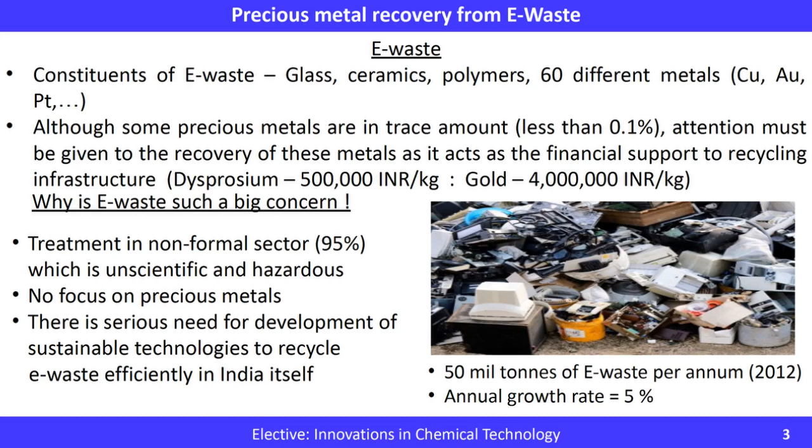Next, I'll tell about the extraction strategies. First is the traditional method, which is open air incineration and uncontrollable burning - these are pyrometallurgical techniques like smelting, sintering, melting. In these methods, fumes of heavy metals like mercury, cadmium, and lead are released, and formation of halogenated dioxins occurs as well. This method is very expensive and energy intensive, and selective recovery of metals is not possible using these methods.

Hence there is another set of methods known as hydrometallurgical methods, where a series of acidic or caustic leaching are used to extract precious metals from solid materials using acids like cyanide, halide, thiourea. These are safer as well as more selective. Because they are more selective, proper recovery of base metals from the solid material ensures enrichment of precious metals in the solid sludge left over, and thereby we can recover precious metals more easily. The major disadvantage here is that it produces a large amount of liquid sludge due to the inorganic acids used in hydrometallurgical processes.

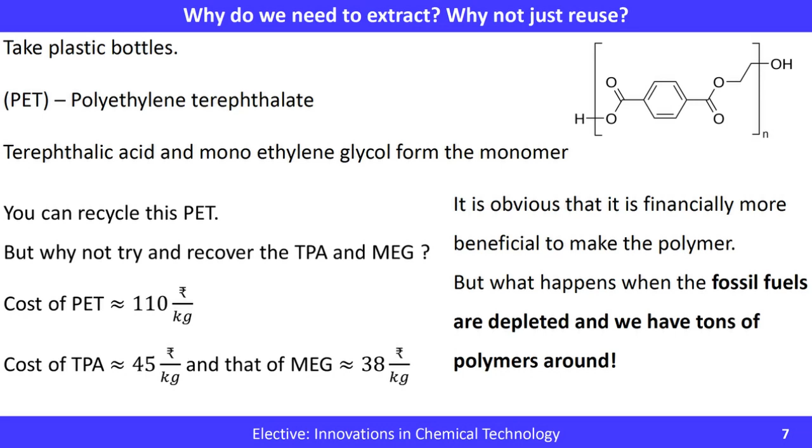It's obvious that the cost of PET is much higher than the raw materials. Otherwise it's not beneficial to make this polymer. But what happens when the fossil fuels are depleted or very low and we have tons of polymers lying around? At that point, this idea might become useful, like extracting those monomers.

We know that polymerization reactions are highly exothermic, which is one of the most important reasons why this idea might be very difficult to implement. There is a huge amount of heat that has to be supplied to break these bonds.

However, some of these polymers actually depolymerize naturally. One of these, ethoxyethyl cyanoacrylate, is used in surgical sutures since the polymer bonds break after a certain time. So we have this dissolving type of stitches. This polymer breaks down after stitching, which makes it easier, so you don't need to remove the stitches after that.

So we must use biodegradable alternatives or design polymers that can degrade when required, that is, they have sort of a timer in them. After a certain time, they will degrade. Thus, this idea of monomer recovery is not new. However, it's difficult to break these bonds, which is why it might face difficulties in implementation.

So the equipment part of it is we focused on the Bosch process, the Haber-Bosch process, and we will focus on the process development part of it.

Can I just ask one question on each of your presentations? Yes, sir. I mean, at that point, okay? Before you go to the next presentation. Right. Yes.

I thought that in the biometallurgy area, although it looks like a very good idea, and you are talking about having genetically engineered strains which are maybe more effective, but I think one of the things we'll need to look at is that an enzyme which is probably confined in the active constituent is confined in the cell, and you've got a solid substance. How exactly does the reaction occur? I mean, how exactly do they see each other? What is the way in which these things penetrate into the core of the mass so that they can react?

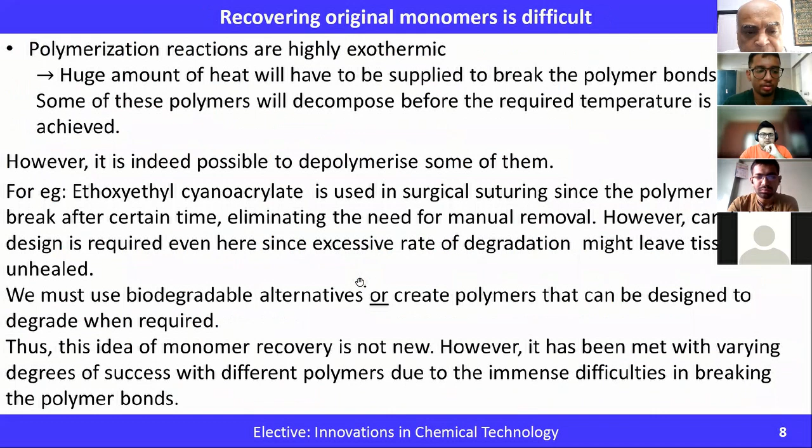Now, in terms of also the idea of using a biodegradable polymer, you have given the analogy with the suture, but in those cases I'm not really getting back the monomer. I don't know what really happens. Do you get back the monomer? No, sir, in that case it is essential that it is disposed of.

But if we design these materials with a signal that if you reach that temperature it might break down spontaneously, then the task of recycling becomes easier, because then you just take them and once you apply those conditions they automatically depolymerize. They have been designed to depolymerize, but what you have to see is whether they depolymerize or whether they decompose, go all the way decompose.

Yes, sir, I think that's the biggest problem, you see, because if it is depolymerization, then of course the energetics will again come into play, since these are very endothermic processes. Okay, but that's all right.

There are so many uphill reactions catalyzed by enzymes, but you have to make sure they're targeted for monomers rather than just going to CO2, because that polymer bond is one of the strongest in most cases. The analogy with the suture is good, but remember there are basic differences between the two. Their recovery is not the priority here; the bigger issue is just getting rid of it, not recovery.

In the Bosch process, we focused on the heat exchange and instrumentation part, since material and lining design of the jacket was already covered. The first thing Bosch tried was heating the converter, the catalyst bed, externally using heating gases across the jacket. Problems encountered included temperature gradients forming across the jacket, and at high temperature the low strength of steel caused buckling and cracking of the tubes, even explosion of tubes due to cracking. Heat exchange was insufficient, so Bosch had to use two additional regenerators in front of the contact tube. This configuration was used, and the spiral tube was later replaced by a vertical regenerator to avoid pressure losses.

So the next thing Bosch tried was to overcome these difficulties. Internal heating of the converter was done by passing syngas and air, and heating occurred by combustion of this syngas-air mixture. For bigger production, Bosch found that the heat of reaction was enough to maintain the temperature, and they only needed to heat initially to bring the bed to the required temperature.

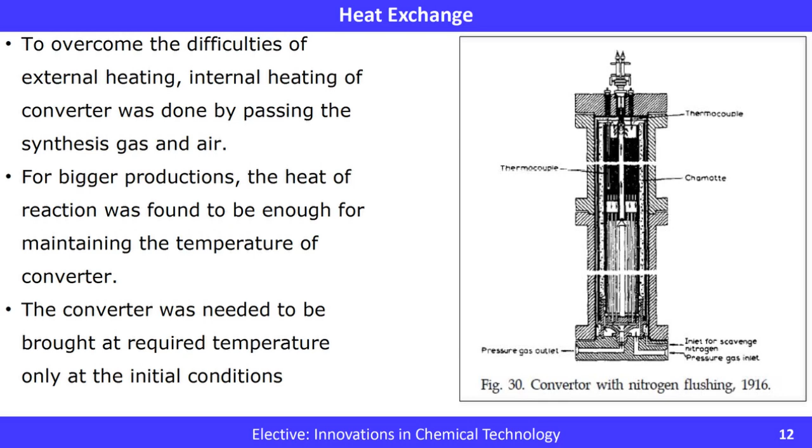There were also disadvantages with internal heating using the syngas mixture. Gas heating needed to be done in reverse mode with respect to normal operation, causing cracks in the lining due to stoppages. The heat supply was from a single point where the air and syngas mixture combusted, which led to temperature gradients. Gas heating was eventually replaced by electrical heating, using an electrical wire of 5 meters length passing throughout the catalyst bed, achieving uniform heating.

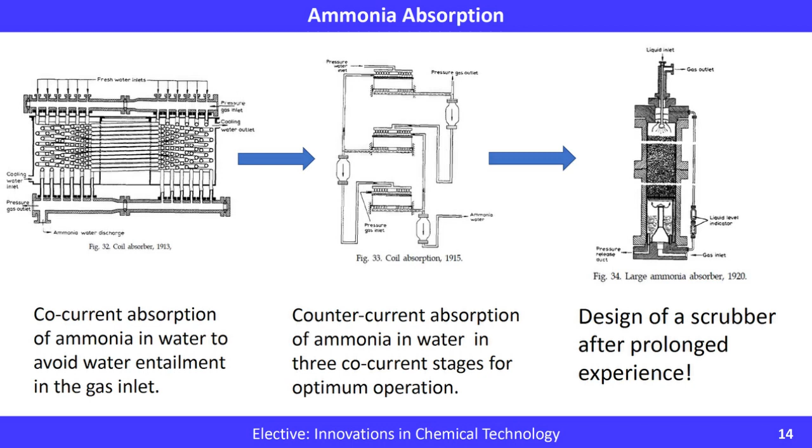The next part was absorption of ammonia in water. Bosch followed several strategies. First was co-current absorption in water, done to avoid water entrainment back into the ammonia reactor, with water and ammonia flowing in co-current direction. Due to the inefficiency of co-current operation, they replaced it with three counter-current stages, eventually achieving a final counter-current absorption mode, which was the most efficient scrubber design.

Another remarkable thing was that they built their own equipment—today most instruments are available commercially, but at that time BASF built and tested their instruments in-house. Some of these instruments were the pressure balance to measure gas pressure, a previous version of the manometer using a U-tube and mercury, and the density meter to record gas densities.

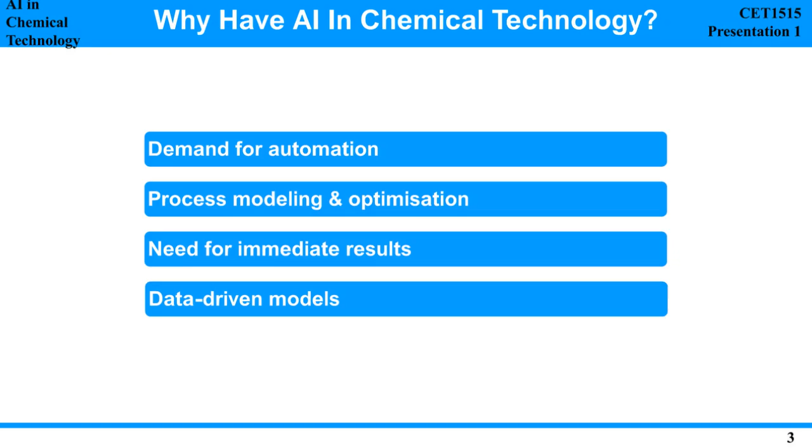So we will just look through one of the seminal artificial intelligence algorithms developed over time. The initial one implemented in chemical engineering was: if we have a certain raw material, what should be the intermediate reaction steps needed to get a product, and this has to be the most efficient way to reach our product.

So what they did was assume multiple reaction pathways. Each reaction was assumed to be elementary, or depending on like if it was hydrogenation, what would be the typical kinetics of it. They had thermodynamics data like heat of formation, heat capacity, and used these to model different reaction pathways and find out which process synthesis method was most optimal.

Next slide. This is called the expert systems era, which lasted about a decade. What happens in this process is it's dependent on knowledge. So what they did was give certain governing equations, like if you have a stirred tank reactor, what would be the temperature and residence time dependence, what is the thermophysical data of the entering reactants, and what should be the constraints, like the temperature should lie within a certain range and the pressure should lie within a certain range.

So they developed this as an if-else statement, which is still a pretty rudimentary artificial intelligence algorithm. For example, if process A was a stirred tank reactor, if the conversion is not achieved in one reactor, the if condition could be should we add another reactor and proceed to the next step, or if conversion is being achieved we can directly move on to the next step. This was the concept behind MODELL.LA, developed by Stephanopoulos in the 90s. Next slide.

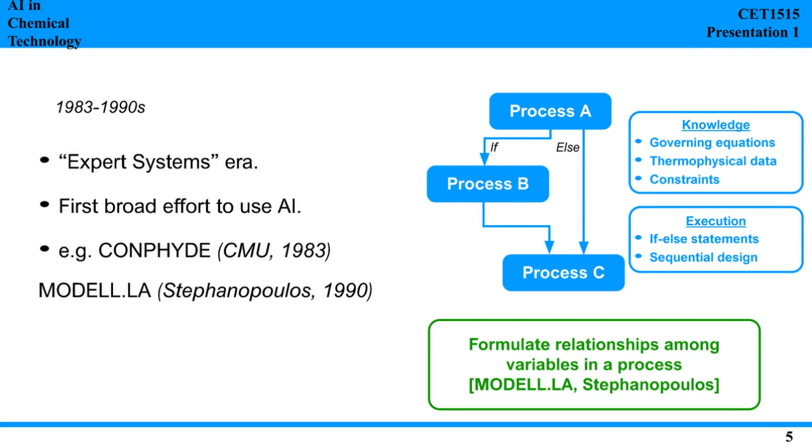This was known as the neural network era, because previously neural networks were designed only for linear systems. In image recognition, we don't need to know what is the mathematical model in between, as long as it is predicting. But we cannot do that in chemical systems, because we need the in-between steps to also follow the physical laws. So they started with a bottom-up approach, where if you can easily model small units of a process, you can scale that up to a big unit, instead of a typical top-down approach.

The reason this was implemented in chemical engineering was that mathematicians had developed non-linearity in the neural networks.

And we have HT kinetic data, which is high throughput experiments, so from experiments we have certain kinetic data. What they used to do was develop different models, use a neural network to find the rate constant mechanism, and through this find out which was the most efficient catalyst for a given reaction. This was how catalyst design would be carried out using artificial intelligence.

Next slide. Presently there are three major tools that were developed. The first is an artificial neural network. So from a typical neural network, an artificial neural network mimics how the neurons in the brain work, so it becomes a more complex structure.

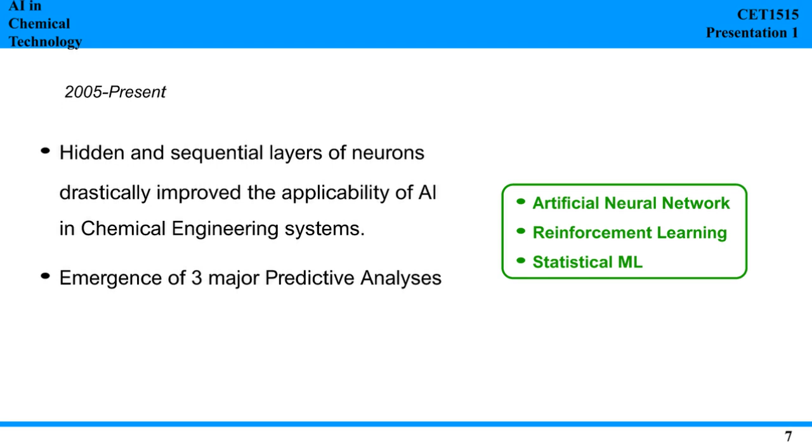Don't exceed your time. Huh? Oh yes, sir. Yes, sir.

The first one is the oil production rate from a well, which they modeled using artificial neural networks. The second one was operating a distillation column, where they used a first principles model to develop the mathematics of the flow rate, and incorporated a neural network to reduce the fluctuations in profit.

Next slide. So why is AI not more prevalent in chemical technology? This is because chemical systems are very difficult to model even today, and there's a lack of interest in commercializing AI in industries, because conventional models are still functioning as effectively as AI today. There was also a lack of data and computational power back then in phase 1 and phase 2, because of which there was no motivation or practicality at that point of time.

There were also intellectual challenges — people were not used to handling computational equipment as well as they are today. Next slide.

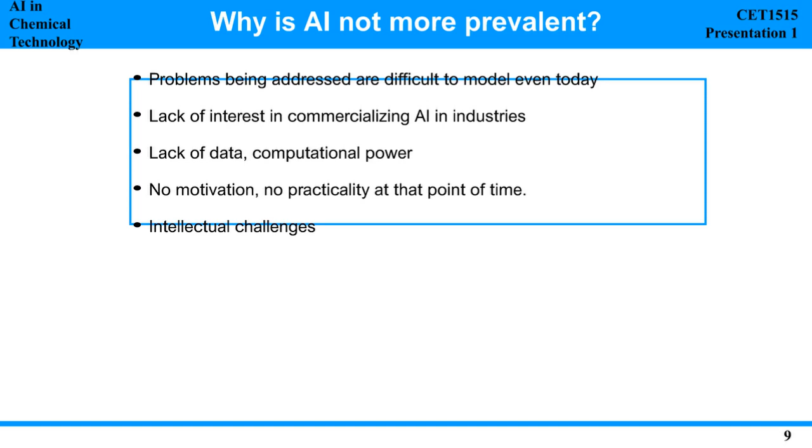But these problems are going away due to the following reasons. One is Moore's law, which has improved computational power to a great extent, and data collection has become more prevalent. People are focusing more on collecting data and incorporating it in AI, and new programming languages like C, C++, Python have made coding more user friendly. Hence more people are able to use AI and ML, which was particularly the push for phase 3 — to develop AI to outdo the existing technologies.

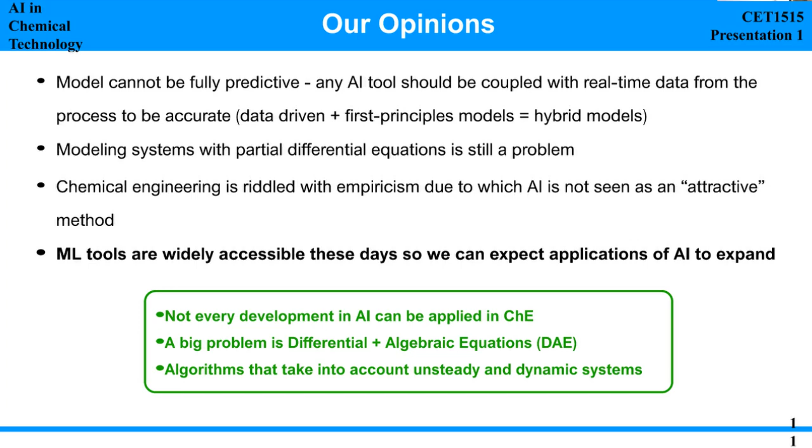But modeling systems with partial differential equations coupled with algebraic equations, called DAE, is still a problem. Even though AI and ML have improved over the last 40 years, we still do not have a concrete solution for the Navier-Stokes equation. Chemical engineering is highly empirical of all engineering branches, and that is a major stumbling block for the application of AI in chemical technology. Because of its empiricism, AI is not seen as a very attractive method. But ML tools are widely accessible these days, so we can expect the applications of AI to expand in the near future.

So I was guided to this process where we could describe a non-ideal reactor as consisting of a network of several small ideal reactors, each having its own temperature and residence time, because the non-ideal reactor had a lot of temperature variation. If we had tried to model this accurately with mathematics, there would be a lot of differential equations, and it would be very complex. But by modeling it as a simple network of ideal reactors, the mathematical model was simplified, and we can use neural networks to find out what were the rate constants and what the reaction pathway actually was.

This was a second example of using ML tools which I encountered during my research project. We were working on the extraction of acetic acid from water, which requires the estimation of partition coefficient using thermodynamic models, and the one that we chose was UNIFAC. Its activity coefficient calculation includes combinatorial and residual activity coefficient, which is called gamma.

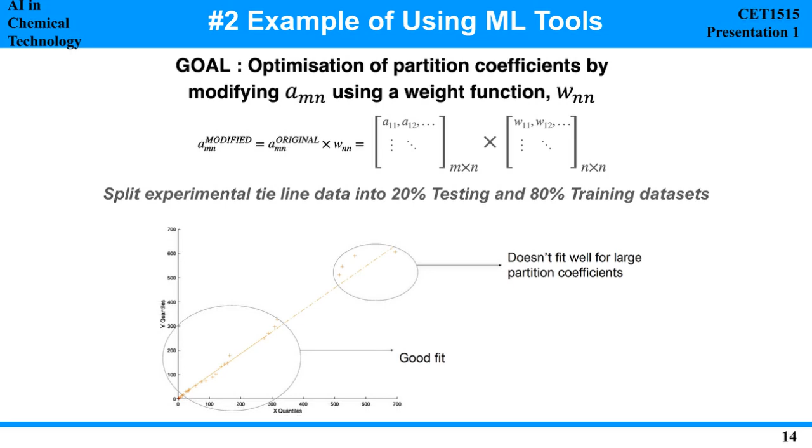So the first part is over.

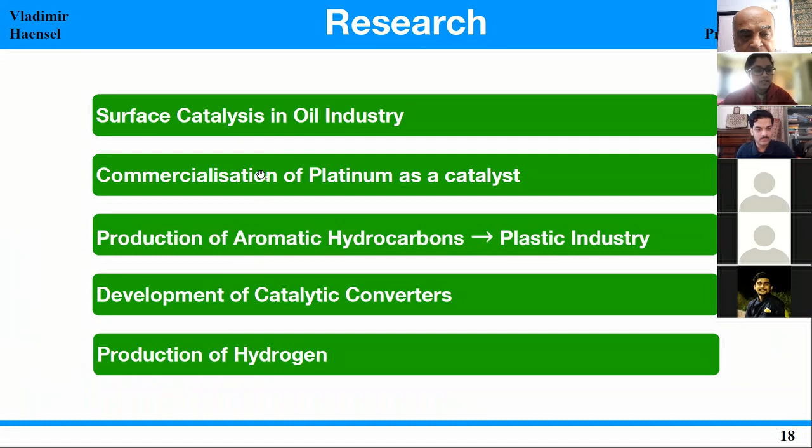So Vladimir Haensel's research mostly focused on catalysis, and he was responsible for the commercialization of platinum as a catalyst in the platforming process, which will be discussed later. The platforming process was very pivotal because it was producing a lot of hydrogen from the dehydrogenation reaction, and also a lot of aromatic hydrocarbons, which were later incorporated in the plastic industry. His platforming process was also pivotal in developing catalytic converters.

So before platforming process.

The industry used to use thermal reforming, where crude gasoline went into a cracking reactor, and at around 800 Kelvin and pressure between 30 to 70 bar, the dehydrogenation reaction would take place. It was fed to a fractionator, where we got upgraded gasoline with aromatics with a higher octane number, and the light hydrocarbons, mostly methane, ethane, butane, were sent to a mild reformer to create more aromatic compounds, leaving certain residue. But the octane number was still not high enough, only going up to about 65 or 70. So people used to add anti-knocking agents like tetraethyl lead to increase the octane number.

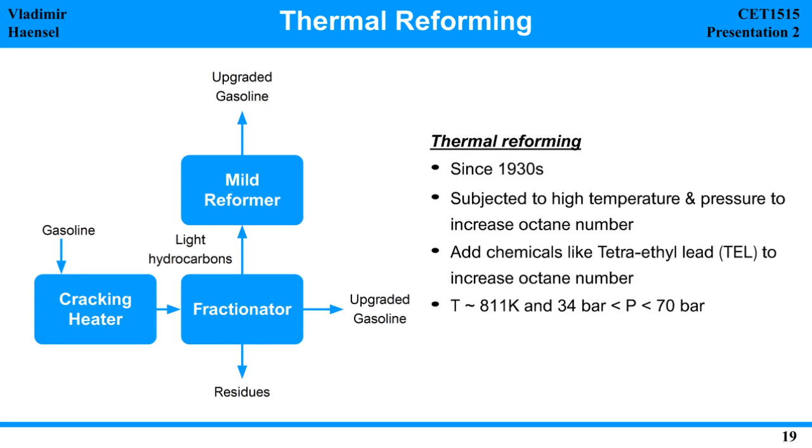The platforming process was the major accomplishment of Vladimir Haensel, who recognized that only the surface atoms of a platinum catalyst actually assist in the catalysis of the reaction. He found that only 0.01% of the total surface, if embedded with platinum, is actually able to give the desired conversion. So what he did was use alumina, and alumina with silica, as a support, and embedded platinum catalyst particles, which people today focus on as nanoparticle technology.

He also found a way of regenerating the spent catalyst using sulfuric acid, because there was formation of platinum alumina silicates, and treating it with sulfuric acid would regenerate the pure platinum.

The use of alumina as a support was another important aspect, because alumina is a Lewis acid, due to which the paraffins in the feed would dehydrocyclize to form aromatic compounds. This was another pioneering invention, because aromatic compounds actually opened or bridged the petroleum industry with the plastics industry. Due to this dehydrocyclization, there was also presence of a hydrogen-rich gas being formed, which was used in hydrotreating sulfur and nitrogen compounds to reduce pollution. So Vladimir Haensel's one stroke of using platinum was a master stroke in 3 different industries.

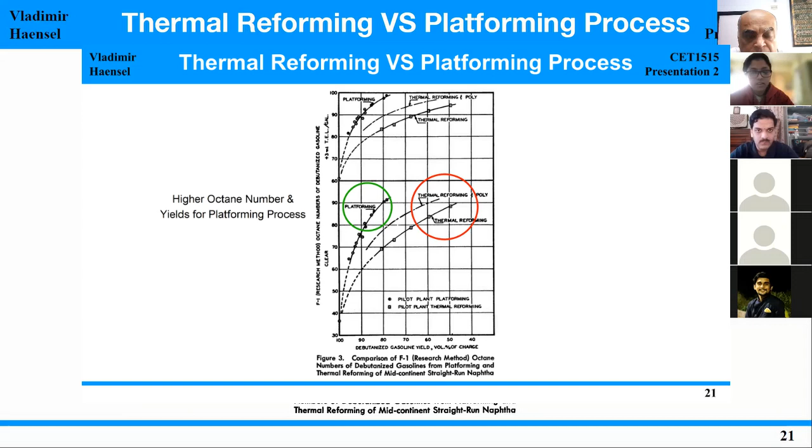Okay, next slide. So this is just a summary: previously with the thermal cracking process, you used to get 65 octane number fuel, and there was an introduction of tetraethyl lead, but there were a lot of environmental concerns. So this was where Haensel at UOP pioneered the platforming process.

Previously, platinum was considered very expensive, but with platinum and alumina support, Haensel argued that in the long time the cost won't be much because of the high value addition from generating hydrogen from the dehydrogenation reaction, and also aromatics like benzene, toluene, xylene, which were later used by the plastic industry.

And this hydrogen is used for treating the crude gasoline that enters the reformer, because if the crude gasoline contains sulfur and nitrogenous compounds, it can deactivate the catalyst. So by hydrotreating it, we can convert sulfur to hydrogen sulfide and nitrogen to ammonia, preventing deactivation of the catalyst using the hydrogen we get from the platforming process. Next one.

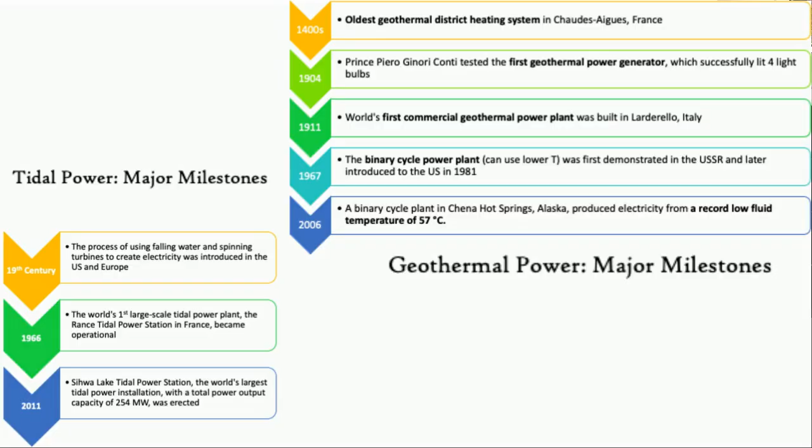Nuclear fission was first discovered in 1938, and the first nuclear reactor was made in the US in 1942. This grew pretty quickly, and in 1956 the first commercial nuclear power station was set up in England and connected to the national power grid. Next.

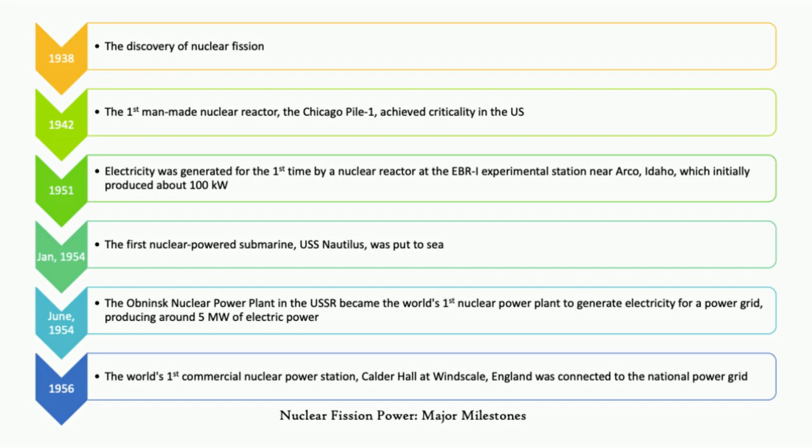Okay, so let's talk about the present scenario. Just speak a bit louder, it cannot be heard properly.

So as we can see on the slides, while hydel and tidal energy have very high energy efficiencies, the rest of all the other energy sources have pretty much the similar efficiency, with the exception of geothermal, which is very low. Also, renewable energy sources make up a very small proportion of the total electricity production, and hence, we are extremely reliant on fossil fuels, where their contribution is almost 85%.

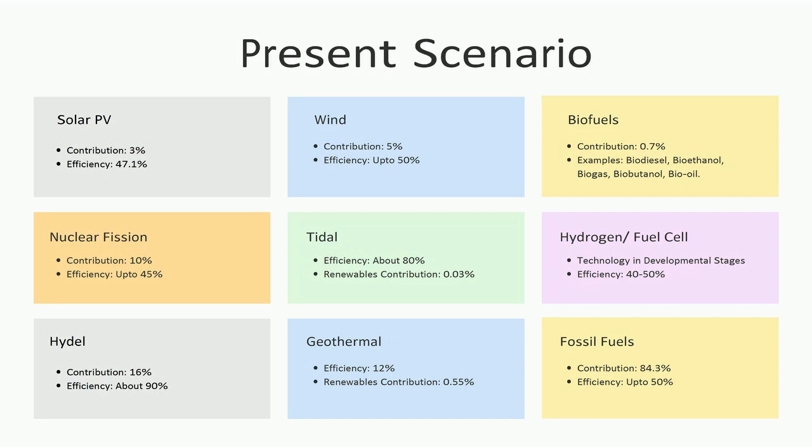So here we take a look at the limitations and drawbacks of all the energy sources that we have discussed. While for most of the renewable energy sources, a common trend that is seen is that they cannot be applied everywhere, like energy and electricity production cannot be used everywhere. Also, another common limitation is the high initial capital cost or the high maintenance charges.

While hydel and tidal power may pose a threat to aquatic life, nuclear fission has other problems of waste disposal. While solar PV do not have such problems, the energy storage itself is a huge hurdle. Therefore, substantial research and development is required to make these sources more practicable.

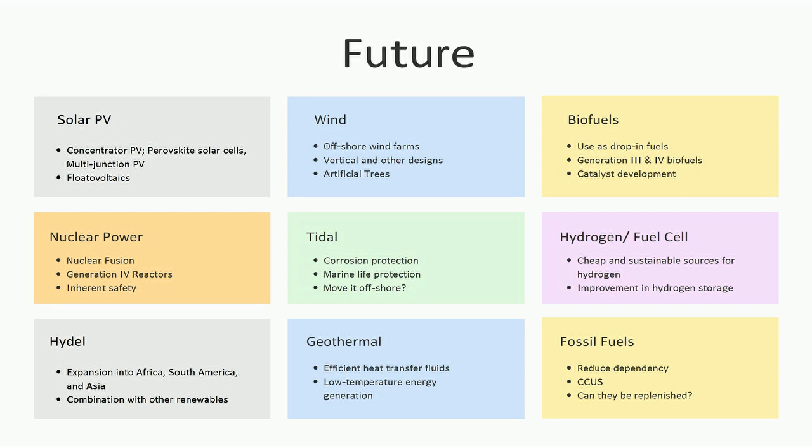So alternative energy sources have the potential to replace the previous slide, I guess. Yeah.

It's a good overview, but it's always good in these kinds of presentations to focus on something a little more narrow, because otherwise it could be more like an overview, which is fine. I mean, I think you've made the case very importantly, and as you've said, that 85% is still fossil fuel. So I think a little more on how exactly this trend will shift could have been given a little more emphasis, and perhaps even in the Indian context, which are the ones where we should focus, would have been useful. Okay, but otherwise, it's a very good overview.

The Hampson-Linde cycle is a positive feedback cooling system, completely based on the Joule-Thomson effect, which states that a real gas below its inversion temperature cools on expansion. The process was similar to the Siemens cycle, except for the moving piston, which made the gas do work. The Siemens process was mainly developed for refrigeration and not for air liquefaction, which may have been the inspiration for Linde to work in this area.

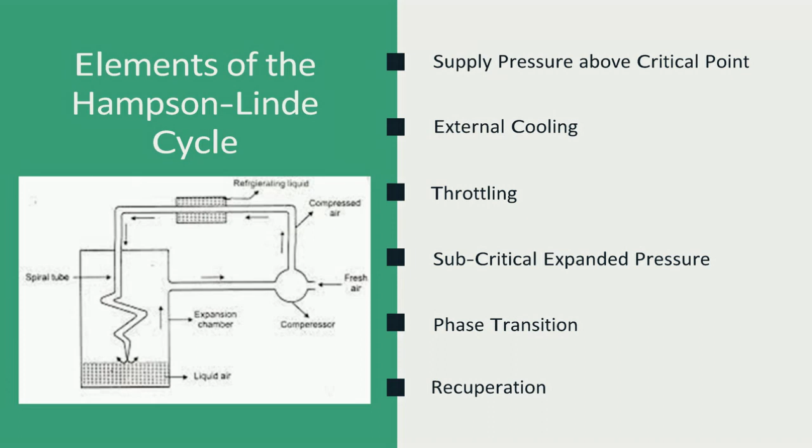The Siemens process can be considered a precursor to the Linde-Hampson cycle. However, it failed to achieve 100% liquefaction. Its objective was to obtain work from the expanded gas. The Joule-Thomson effect, along with the Siemens process, led to the innovation that is the Linde-Hampson system.

Linde's genius was that he developed the first commercial refrigeration system that helped in the complete elimination of ice boxes in the food industry. He saw the potential in the refrigeration system and expanded it to other industries. Later on, while working on cooling using carbon dioxide, he discovered that the Joule-Thomson effect can be used to liquefy gases, and subsequently he expanded this idea to air separation.

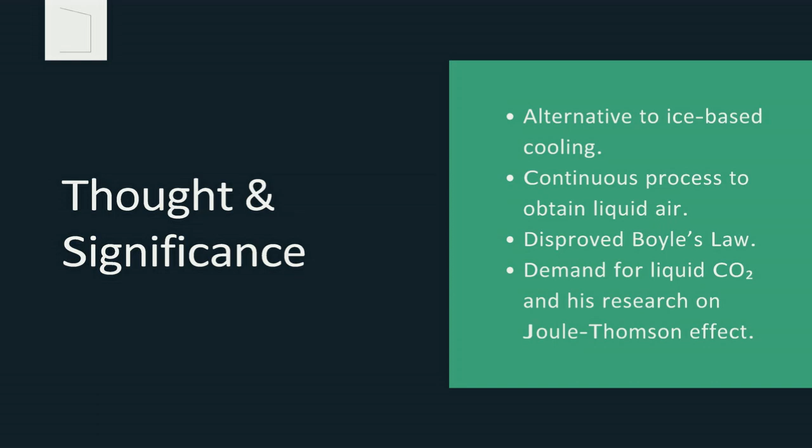Next slide. The importance of liquefaction of air is indirectly portrayed by the industrial and huge demand for liquid oxygen, nitrogen, and argon. While liquid oxygen is used for metal cutting torches and as an oxidant for rocket fuel, it is also currently used to provide oxygen to patients who have breathing problems.

Liquid nitrogen is used in cryogenics and for refrigeration and cooling. And liquid argon is used for many applications as it provides an inert environment, so it is used in argon gas discharge lamps, and it is also used to provide an inert atmosphere for growing silicon and germanium crystals.

So thus we conclude our presentation with these two significant figures in the history of science, and would like to thank you for listening to us.

Well, yeah, thank you, I think it's a very comprehensive presentation. I don't know, would you like to give credit to them for disproving Boyle's law, or somebody else, the people on whose work all of this is based?

Yes sir, but as we discussed, the Siemens cycle was the precursor that we considered. It was mainly done for cooling and to perform work using a gas. But here they showed that we can cool it and then liquefy the gas as well.

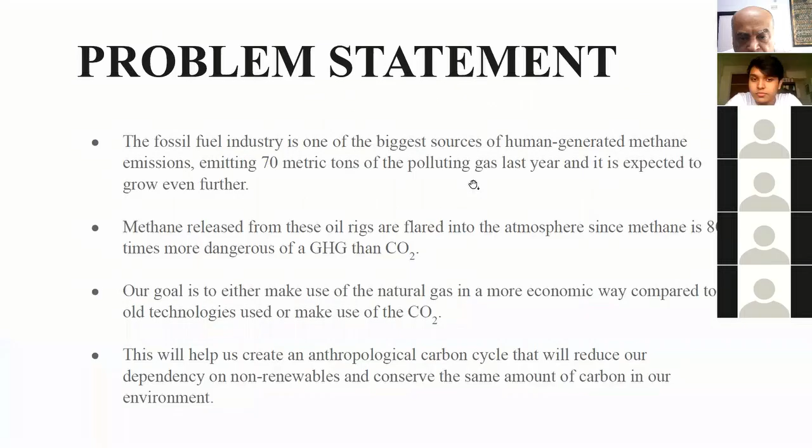I have targeted a very specific problem statement about this, which is that a lot of methane gas or natural gas is flared in the oil rigs, which is a polluting gas, and right now it cannot be stored because of safety issues, and also these companies aren't ready to put money into this technology yet. Basically around 70 billion metric tons of natural gas is just flared into the environment after processing it safely. But the thing is, we can use this natural gas.

Methane is actually 80 times more dangerous of a greenhouse gas than CO2, that is why methane is burned into CO2 and then released into the environment. It's a billion metric tons - I missed the billion in my presentation, I'll correct it later.

Basically, our goal is to either use the natural gas in an efficient way, or even if it is burned away, to capture that carbon dioxide and use it in a more economical way. The ultimate goal is to form an anthropological carbon cycle, so that this carbon stays in the environment and we reduce dependency on petrochemicals. Next slide.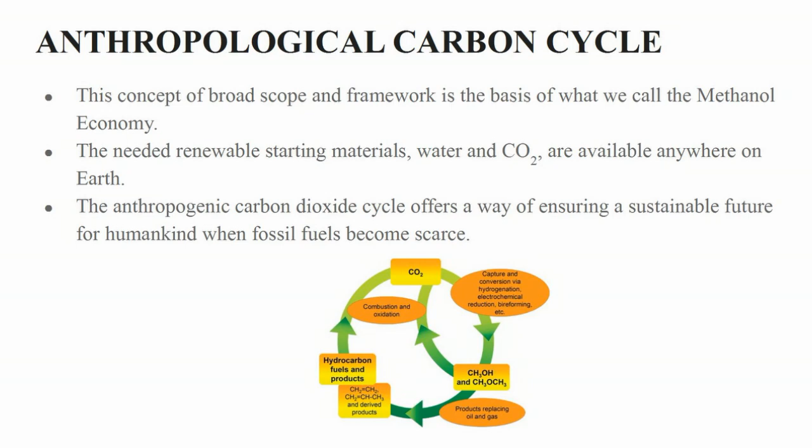Why in the first place do they flare this natural gas? What is the reason? Why do they burn it? They burn it because methane has more heat capacity and is a more dangerous greenhouse gas on the oil rig, and CO2 is 80 times less of a greenhouse gas than methane. So they would rather have CO2 in the air than methane.

Is it because they are recovering natural gas anyway? Is there a surplus of natural gas? No, basically when oil rigs are dug, natural gas comes out from the ground which cannot be captured economically. So they just vent it out and burn it away into the environment.

But what I'm saying is that's the point—if that is the issue, then converting it into methanol, that problem would still remain, right? How would you take it out in the first place? So I think a little deeper understanding of why the methane is vented out would be helpful. Otherwise you can do all of this and people will say, but this is the problem. So try to go back and figure out why that is the case.

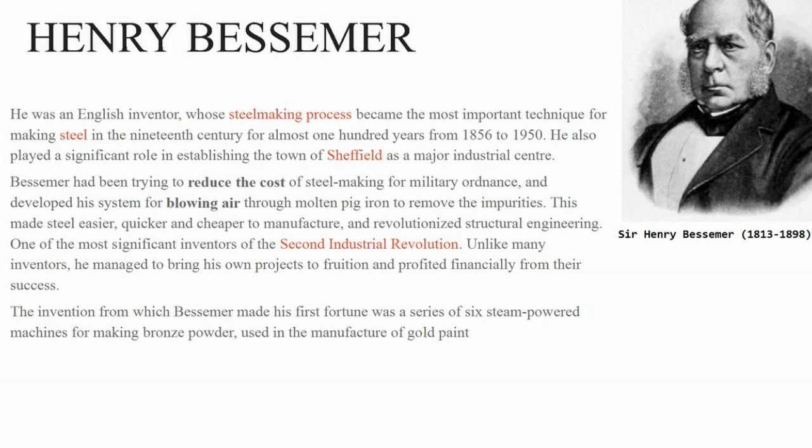The invention from which Bessemer made his first fortune was a series of six steam-powered machines for making bronze powder, used in the manufacture of gold paint.

How was he introduced to steel? During the Crimean War, Bessemer invented an elongated artillery shell rotated by the powder gases. However, the French authorities he was negotiating with pointed out that their cast iron cannons would be ineffective against this type of shell. So he set out to create a more durable cast iron.

Bessemer discovered that blowing air through melted cast iron not only cleaned it but also heated it, allowing the refined iron to be poured more easily. The reaction of oxygen with carbon and silicon in the iron causes this heating effect. He used these new techniques, which later became known as the Bessemer process.

Steel manufacturing process: the Bessemer process. The best feature of the Bessemer operation, which strikes us most wonderfully, is that cold air is blown in great quantity through melted pig iron, and yet the iron is hotter at the end than at the beginning.

For example, if fuel were on fire in the converter, it would certainly be made much hotter by the air blast. Similarly, the oxidation or combustion of part of the ingredients of pig iron furnishes all the heat required for the process. For example, 10 tons of pig iron contains some 350 kilograms of carbon, which when all burnt out in the Bessemerization furnishes heat equal to the combustion of some 400 kilograms of coke.

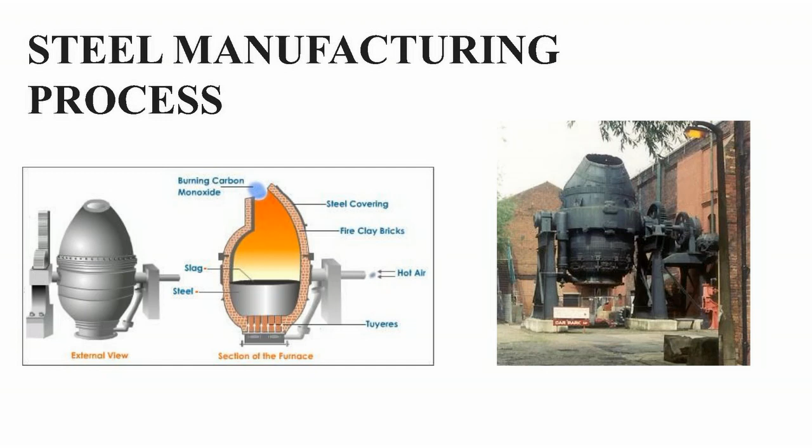His other inventions: he has over 100 inventions in iron, steel, and glass. From 1838 through 1883, Bessemer was a prolific inventor, holding at least 129 patents, including military weaponry, movable dies for embossed postal stamps, a screw extruder for extracting sugar from sugarcane, and others in the iron, steel, and glass industries.

In 1857, Bessemer was granted a patent for casting metal between counter-rotating rollers, a predecessor of today's continuous casting techniques. Interestingly, Bessemer's original idea has been realized in the continuous direct casting of steel strips.

Honors and legacy: Bessemer, a pioneering innovator, was awarded many honors for his contribution to science. In 1879, he was conferred the title of knighthood and was inducted into the Royal Society of London. The American Academy of Arts and Sciences honored him by nominating him as their foreign honorary member in 1895. In 2003, Bessemer was named among the top 10 technological innovators in human accomplishment.

To conclude, Bessemer was an important part of the Industrial Revolution. His innovations changed the steelmaking process, and he is an important figure in history. Thank you.

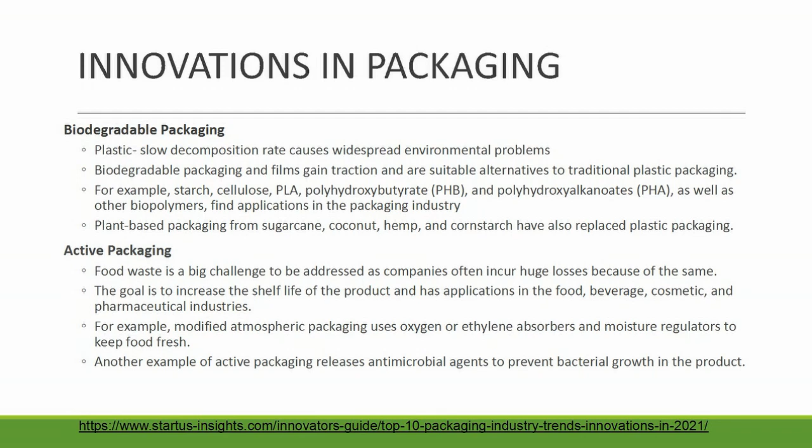Moving on to recyclable packaging. With countries banning single-use plastics, businesses and industries have to look for materials other than plastic for product packaging to comply with regulations. Here the example can be proposed of post-consumer resin as a recyclable packaging material derived from post-consumer waste.

Then coming to edible packaging - usually packaging follows the use-and-dispose model and so largely contributes towards solid waste, ending up either in landfills or in water bodies. Edible packaging here poses a revolutionary alternative or innovation that addresses the challenge and closes the loop for packaging.

A good example here is of packaging made from milk protein, such as casein film around food products, and these films are better at keeping food fresh compared to plastic as well. Then edible spoons, straws, and other cutlery items have also been proposed for use in restaurants, cafes, or ice cream parlors, as an alternative compared to plastic.

As we all know, nanotechnology is a ubiquitous field, and hence it finds application here as well. From packaging materials to product safety, authentication, and tracking, nanotechnology has delved into the packaging industry. The use of nanoparticles mixed with polymer chains was reported to enhance barrier properties and tensile strength as well. Further, nanomaterials in packaging enable tracing and anti-counterfeiting for brands and packaging companies.

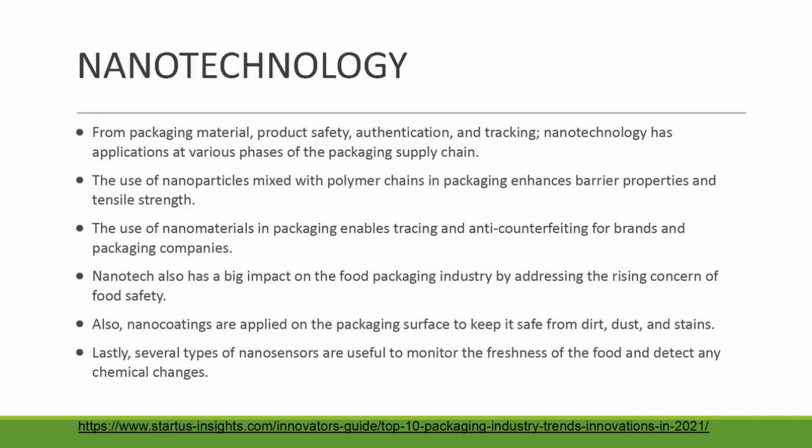Moreover, nanotechnology has also shown a big impact on food industries by addressing the concern of food safety. Nano coatings are applied on the packaging surface to keep it safe from dirt, dust, and stains. Lastly, several types of nanosensors are useful to monitor the freshness of food and detect any chemical changes.

Gelatin is one such material which can be used to replace plastic packaging or films.

Gelatin is a white or yellowish translucent lustrous solid and is a partially degraded product of collagen in animal connective tissue. Gelatin is widely used in the food, pharmaceutical, photography, and cosmetics industries due to its functional characteristics, including water binding ability, gel formation ability, water vapor barrier, film forming, foam forming ability, and emulsification tendency.

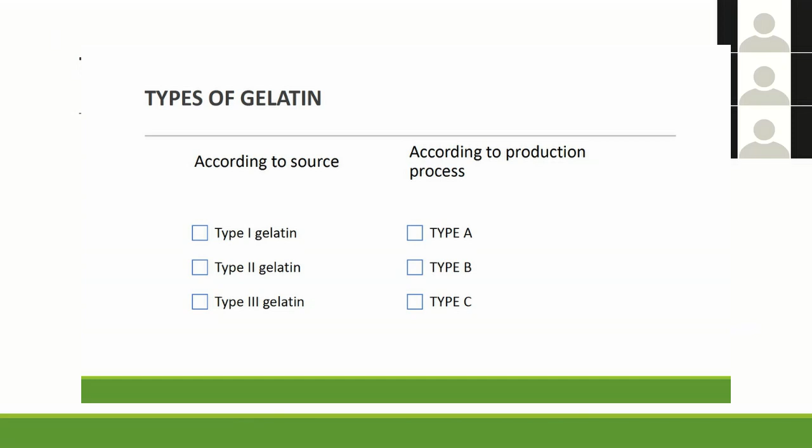Coming to the types of gelatin, we can broadly divide it according to its sources and according to its production process. According to sources, it is divided into type 1, type 2, and type 3 collagen-derived gelatin. Type 1 collagen-derived gelatin is primarily found in connective tissues such as skin, bone, and tendon of mammals. Type 2 and type 3 are other types of collagen gelatin, found in cartilage tissues of very young skins and organs respectively.

According to the production process, they are classified as type A gelatin products obtained by acid extraction, called A gelatin, which has an isoelectric point in the range of 6 to 9. Type B gelatin are alkali extracted gelatin products, with an isoelectric point of pH 5, which can be applied to the more complex collagen found in cowhide. Compared to type A gelatin, nanoparticles in type B gelatin have a higher degree of cross-linking and therefore degrade more slowly.

The gelatin films are majorly produced from three methods: coatings, extrusion, and solution casting. Among these, solution casting is the most widely used technique for the production of gelatin-based films.

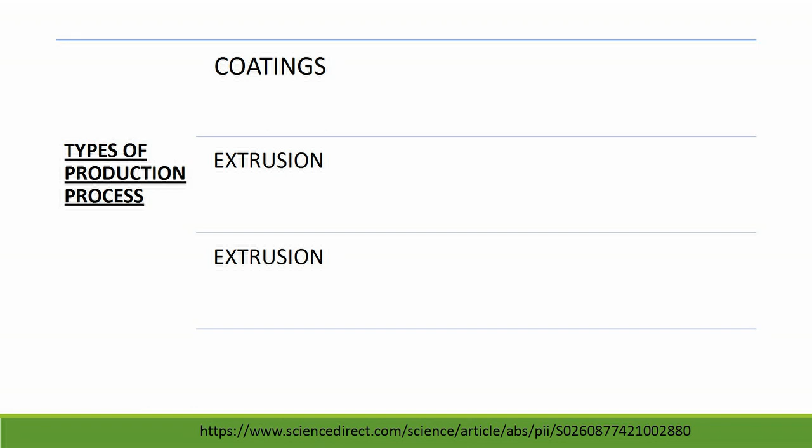The problem with gelatin is that it suffers from weak mechanical resistance and permeability to water vapor molecules, which somewhat limits the use of gelatin as a packaging material. But this problem can be solved by mixing or adding other functional materials and active ingredients to gelatin.

At present, the gelatin film can be prepared by coating, casting, and extruding. But the preparation of films by means of extrusion molding is still not a simple matter for us. Therefore, studies on the extruded film are still required.

When you're talking about gelatin, are you talking more about pharmaceutical applications? Because that's typically where they are used, in capsules and things like that. No, I was talking about this in the packaging of films, in food packaging. Yes, so it goes beyond capsules and into food packaging.

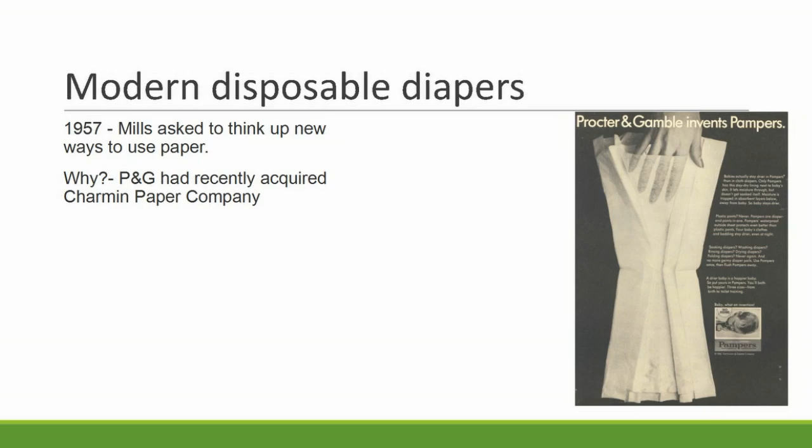Victor Mills has many inventions. I'm just going through one of the most major ones. Another is the ivory soap innovation, another Procter and Gamble product. The word ivory isn't really important - it's just a soap basically. His main innovation was that the soap stock, which was previously manufactured in a batch process...

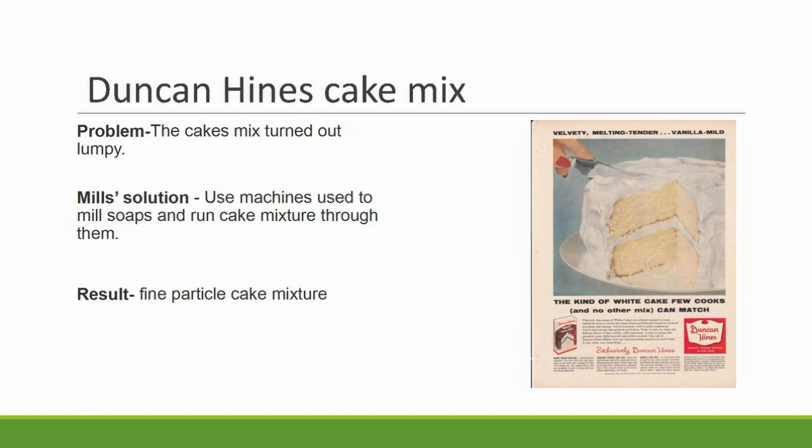Pringles, which is a very famous snack, was owned by Procter & Gamble then. It is owned by Kellogg's today.

This is also amusingly related to the soap making process, because Pringles is a potato snack, but the way they make it is very unique. They finely grind the potatoes into a powder form, mix it into a slurry, press it into a mold, and then bake the material. So you're getting these fixed shape, uniform shape potato chips that also have flavor dispersed evenly.

Because they're evenly shaped, you can package them such that you have minimum air inside, which helps in storage and distribution. So how does soap factor into here? The soap making process also uses the slurry system, then it's transferred to a mold and then baked. So that's how the whole idea of Pringles emerged.

I'll show you the manufacturing process in a second. Next slide please. So this is a schematic from the patent of Pringles filed in 1976, if I remember.

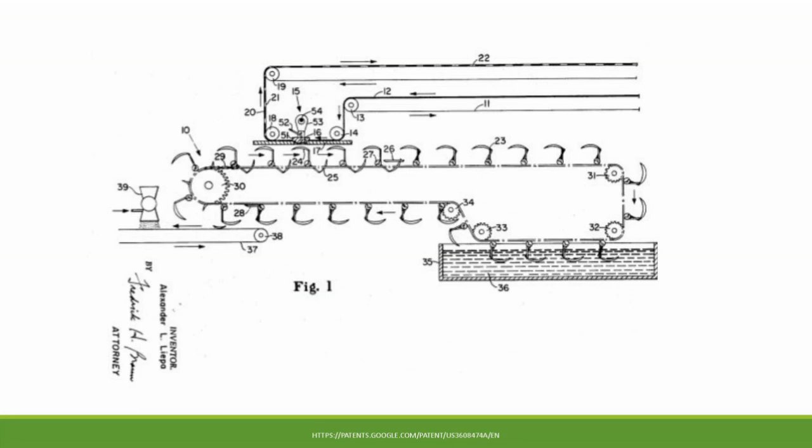These are just some innovations of Victor Mills, shown as innovations he did as an employee in the exploratory division's product. I would say he really got a lot of leeway to do creative and innovative things, because that's what the division mandated, to try new products.

Procter & Gamble have been very well known for shifting core competencies developed across the company into different product areas. They've been very good at it. I'll send you a link to an interview with the vice president of their research, Dr. Shekhar Mitra, who is not there anymore, and who happened to be my classmate at IIT Kanpur.

You will see from that interview how they continue to do this, very similar to Bosch and BASF, how they move knowledge across boundaries from one area into another. So that's a wonderful lesson to learn from Procter & Gamble and Victor Mills.

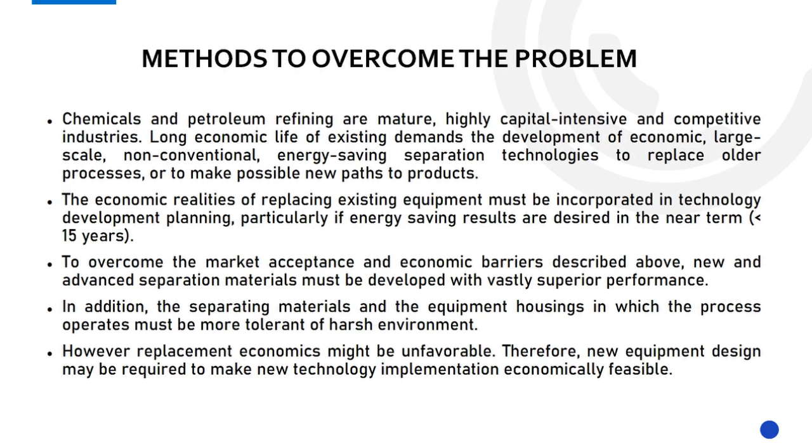In order to overcome the market acceptance and economic barriers we mentioned, new and advanced separation materials must be developed with vastly superior performance as compared to the existing technologies.

The first technology we need to discuss is distillation. As we know, distillation costs almost half of the energy consumption required by the separation processes together. So what are the alternatives for distillation?

Firstly, we are going to talk about extraction and absorption. Solvent extraction and absorption have traditionally been practiced in the industry, but they have been considered as relatively large equipment, requiring large solvent and absorbent inventories. In order to reduce this factor, research has to focus on producing new solvents and absorbents with high selectivity and yield, and also durability to withstand harsh environments. Only then will this technology be competitive to distillation technology.

Here are a few examples of what has been developed in extraction and absorption in order to make it more competitive to distillation. Firstly, we have pi-bonding materials such as cuprous ions and silver ions. These have extremely high selectivity for olefins such as ethylene and propylene, as they form complex compounds with these compounds.

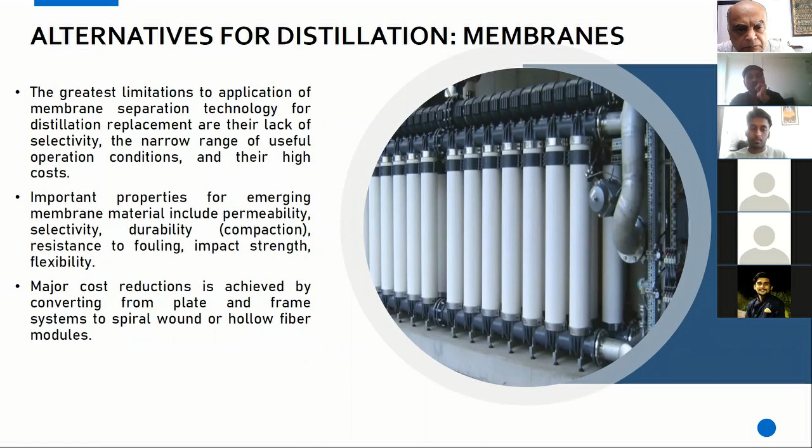Basically there are 2 areas of research going on extensively: inorganic membranes and composite membranes. Inorganic membranes include ceramic, nanostructured membranes, and zeolite membranes. These membranes are not only considered for liquid-liquid separations, but also for gas component separations, using molecular sieving.

Next is composite membranes. Inorganic and organic composite membranes have been developed for low temperature applications.

The third alternative for distillation is hybrid systems. These new hybrid systems include field-enhanced distillation, reactive and extractive distillation, and membrane reactors. Hybrid systems are basically a combination of 2 systems, one being distillation while the other is some other unit operation. This requires the development of mass separating agents and equipment designs to incorporate the separating agents into the distillation equipment itself.

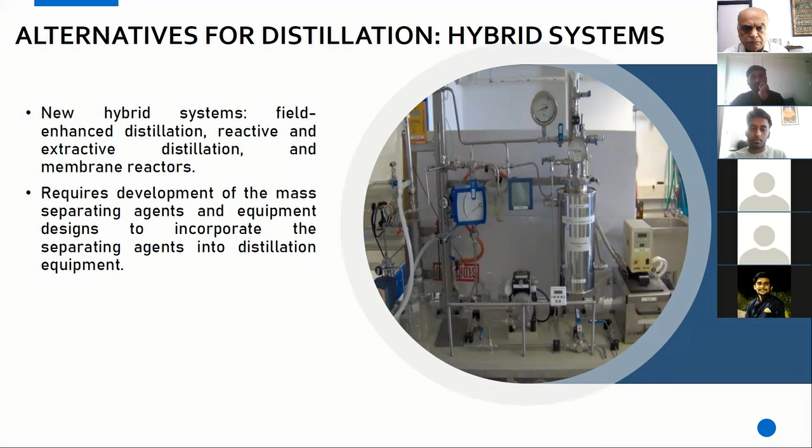The first example is pervaporation, commonly known as membrane distillation. This is an important separation process considering the rapid growth of ethanol as a fuel additive, and it is used particularly to separate ethanol-water mixtures.

Then next is the distillation-adsorption hybrid process, in which we have a rough separation with distillation, followed by polishing with adsorption. The potential energy savings for such systems are very high, and they are considered an effective replacement for distillation technology.

The second technology is evaporation, which also accounts for a much higher amount of energy. The alternatives to evaporation include membranes. As discussed earlier, the properties required for membranes are similar: durability, selectivity, resistance to fouling, etc. But the implementation of these hybrid systems...

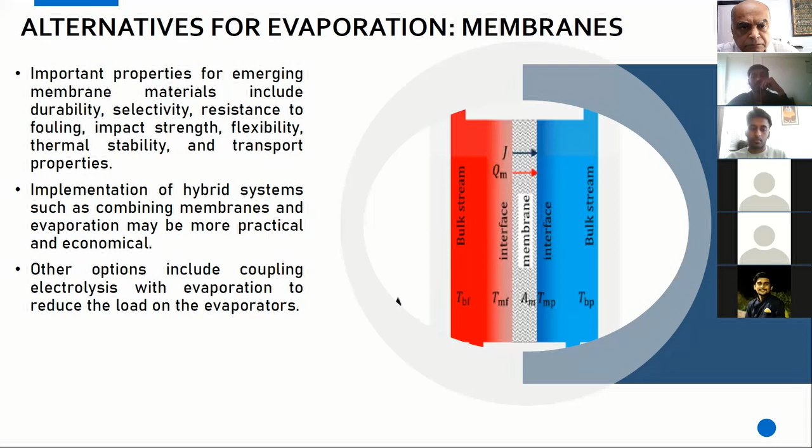Another alternative for evaporation is advanced filtration, such as cross-flow filtration techniques. While considering these techniques, there should be improvement in separating media and changes in the equipment design, in order to make the technology economically competitive to evaporation. Also, other equipment such as vibrating disc and ultrasonics can be used to make the technology more competitive.

So Roshali will explain about the chemical engineer, Henri Moissan.

Now, most of these separation processes with membranes, were they all primarily aqueous systems? Yes, sir, liquid ones, aqueous. There are also membranes which have been developed for entirely organic systems, typically polyimide type membranes, which is a potentially very promising area that is relatively not being worked on. We should look at all kinds of non-aqueous systems and distillation processes and try to replace those with more energy efficient alternatives. Okay, good.

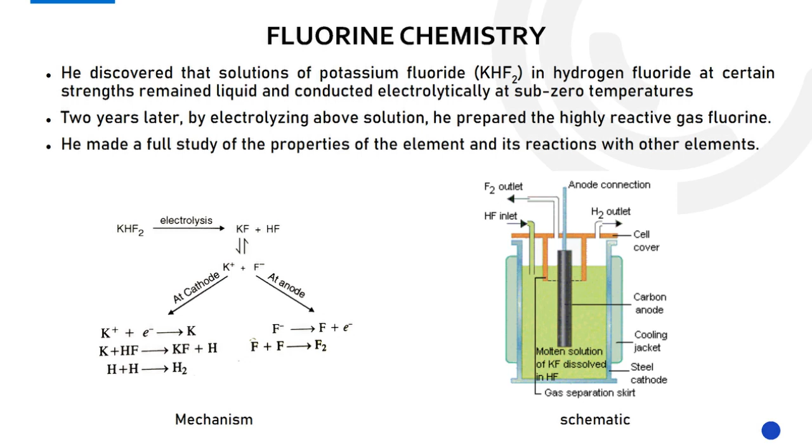Moissan later theorized that we can produce synthetic diamond by crystallizing a cheaper form of carbon, such as charcoal, under the pressure of molten iron. He set out to prove that experimentally, and in 1892 developed an electric arc furnace which could attain temperatures up to 3,500 degrees. He finally produced a few pieces of stone which were shiny and tough like diamonds, but whether they were actual diamonds was very much debatable.

Later in 1893, he discovered silicon carbide while examining a rock sample from the meteorite, and also synthesized various minerals using the electric arc furnace.

The furnace, developed in 1892, was used by Moissan to volatilize many substances which were initially thought to be infusible, meaning they could not be melted. He also synthesized various chemicals using the same furnace, and discovered many new compounds such as carbides and borides. His close study of carbides and their reactions led to a theory that in some cases petroleum may be formed by underground reactions between carbides and water.

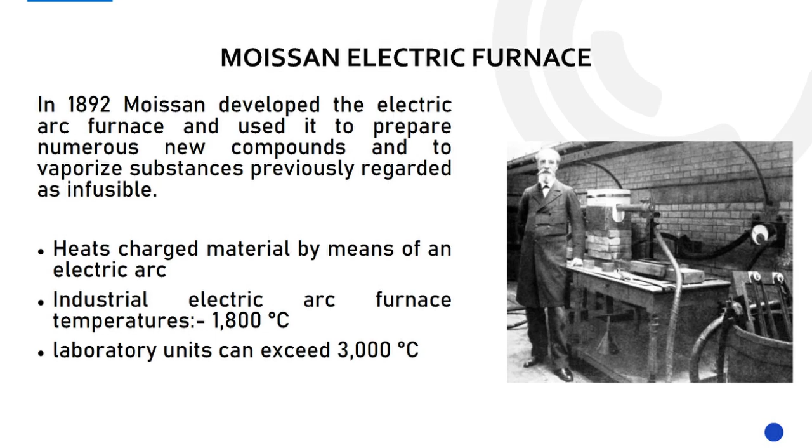Now the significant contributions of Moissan are reviewed here. The first is the method by which he isolated fluorine, which is the same method utilized even today for commercial synthesis of fluorine gas: the electrolysis of potassium fluoride. Also, owing to the electric furnace, he uncovered a wide range of borides and carbides, like silicon and tungsten carbide, which have wide applications in drilling, cutting, and as abrasives.

The Moissan arc furnaces are also the backbone of steel manufacturing. He devised a commercially profitable method for producing acetylene, where he mixed limestone and coal at high temperature to create calcium carbide, and later combined it with water, which is the basic process of acetylene manufacturing.

Finally, his work was recognized worldwide, and he received appreciation through several awards. Henry Moissan was awarded the Nobel Prize in 1906 for his remarkable work in fluorine isolation and arc furnace development. He also received various awards like the Davy Medal by the Royal Society of London and the Elliott Cresson Medal by the Franklin Institute, etc. That's it from me.

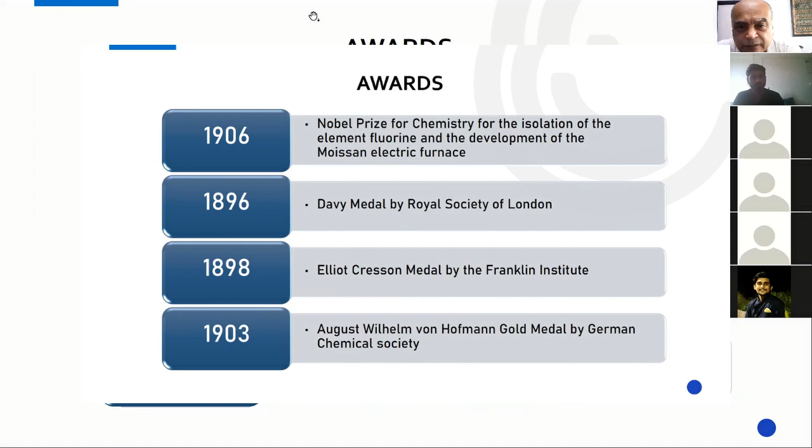As we know, the paper industry represents about 2% of world commerce, and its demand has been increasing every day. Paper is still the main form of communication among people, especially in the educational field. It has an infinite number of industrial uses, among which we can mention those related to packaging and healthcare.

Now talking about the hazards, about 40% of the world's commercially cut timber is used for the production of paper. Pulpwood plantations and mills endanger natural habitats. Over 30 million acres of forests are destroyed annually for paper. The pulp and paper industry is partly to blame for the endangerment of some species that live in the forest. The process of making paper is damaging to the environment from beginning to end. It starts off with a tree being cut down and burned, emitting carbon dioxide into the atmosphere.

An A4 paper requires 10 liters of water per sheet. Most of the materials in landfills are made of paper. When paper rots, it emits methane, a greenhouse gas, and when it is burned or decomposed, carbon dioxide is emitted. Chopping down trees decreases the amount of oxygen in the ecosystem and thus adversely affects other life forms. There's also the continuous use of chlorine as a bleach.

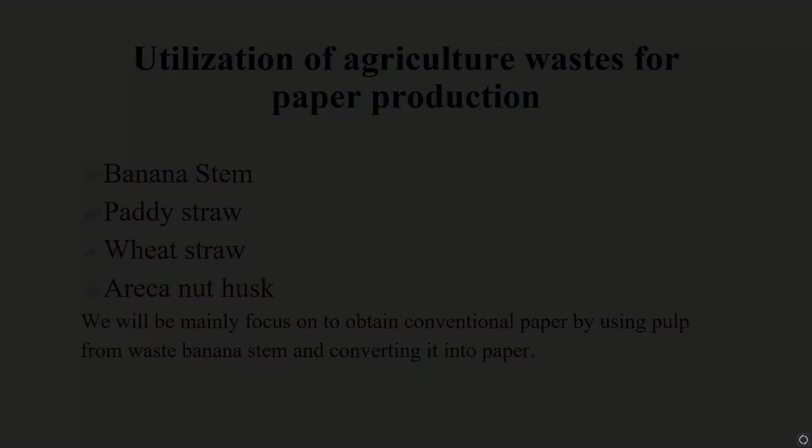Now focusing on the eco part: utilizing agricultural waste for paper production, like banana stem, paddy straw, wheat straw, areca nut husk, but mainly focusing on obtaining banana paper. So what is the current situation? After harvesting, billions of tons of stems and leaves are dumped away on the field, burned, or thrown in the rivers and natural drains, which causes environmental issues.

So why do we select the banana plant? Because banana is one of the important fruit crops grown almost in every state of India, in many seasons and across various different regions. Apart from fruit, it generates a huge quantity of biomass from the stems and leaves, averaging about 60 to 80 tons per hectare in stem alone.

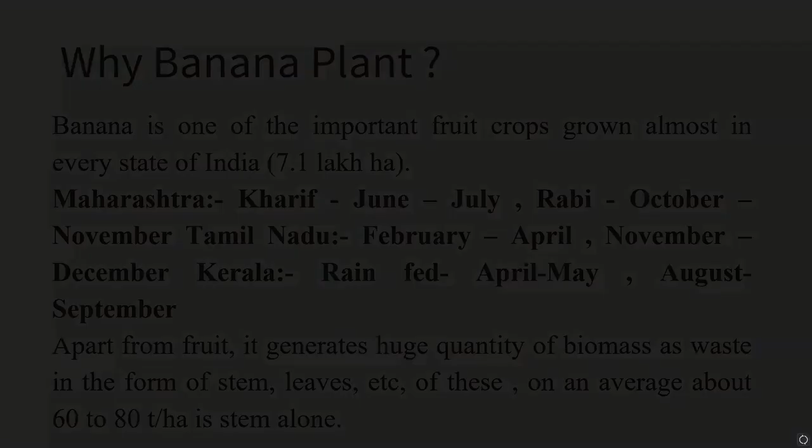So this is how banana paper is produced: first it's chipped, then digested, then pulping and washing, and then it is spread and rolled to form a paper. The advantages are that the banana stem waste disposal problem, and consequent environmental pollution issues, can be solved.

It will be a source of income for farmers. Wood consumption for paper production will be reduced. New industrial setups of banana stem processing will provide new job opportunities as well.

Thank you, sir. This is the end of the first idea part.

I think it's very interesting. Only thing is, it looks like you'll get more customized paper. These mass production papers, like for newspapers and things like that, whether these sorts of paper will be useful for that, I don't know. But it will probably be quite all right for drawing books, painters, artists. That I think will save millions of trees.

So yeah, I think you need to really figure out, and this paper would be biodegradable, right? Yes, sir. I think it's a very good idea. What you should find out is what are the weaknesses of this paper for mass production and mass consumption. That I think is something you need to figure out. Like, for example, can one make toilet paper with this? Because that's one of the biggest applications of paper.

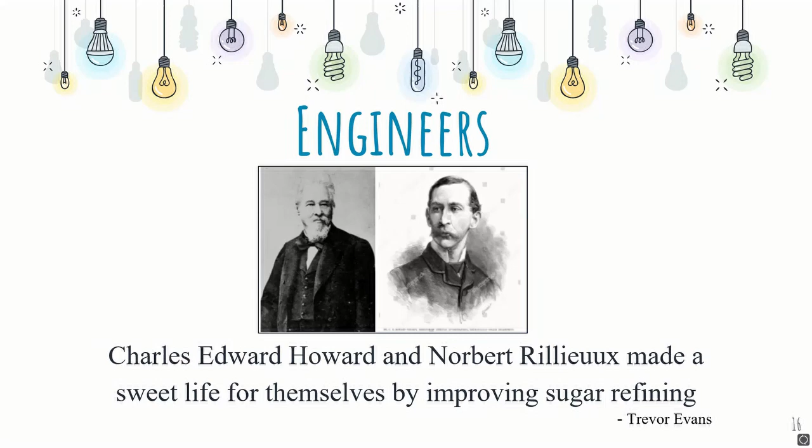From here, I'll be talking about innovation made by engineers which we have chosen to discuss. I will be talking about Charles Edward Howard and Norbert Rillieux. For the whole of humankind, they made life very sweet by improving the sugar refining process, and both of them are recognized as two of the most significant figures in the history of chemical engineering.

It is said that harvested cane was processed at a rate of one slave life per two tons of sugar, because the production of refined sugar was very dangerous. The slaves or workers working in the industry or factory had to face a lot of hazards and challenges, as at that time all the work was done manually, no machinery was there. So they had to hold all those hot equipment with their hands and transfer hot liquid from one container to another. It was very common at that time for sugar refining to cause fire hazards.

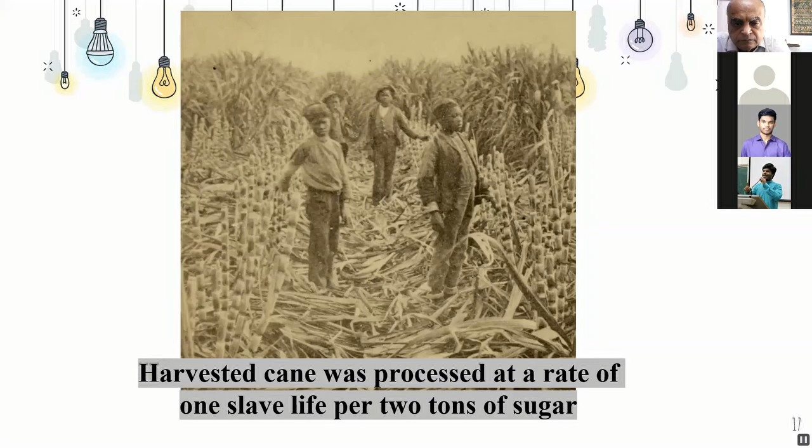So the patent he had known for his vacuum pan, this equipment replaced the process where open kettles were used for making refined sugar.

After this equipment invention, those kettles, known as Jamaica train, were replaced with this vacuum pan, where the temperature can be lowered in the successive pans for getting thicker syrup, and it prevents caramelization and burning of sugar. Using this equipment, we were also getting a purified solution, meaning impurities from the bagasse were removed, and clear crystal sugar was obtained, which was an improved product.

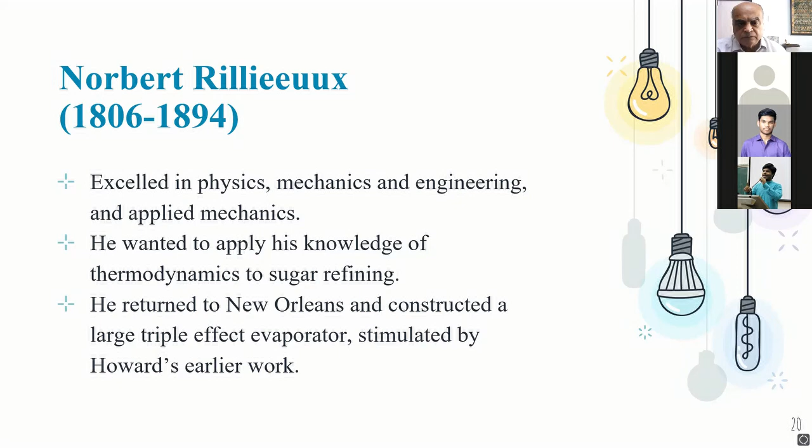In this evaporator, he used the heat of vaporization from the steam in the first evaporator to heat the more concentrated sugar solution in the second evaporator. Similarly, for the successive evaporators, the temperature required was less, as those were conducted in vacuum, and the elevated pressure was reduced for the sugar solution - meaning more vacuum was there in the successive equipment.

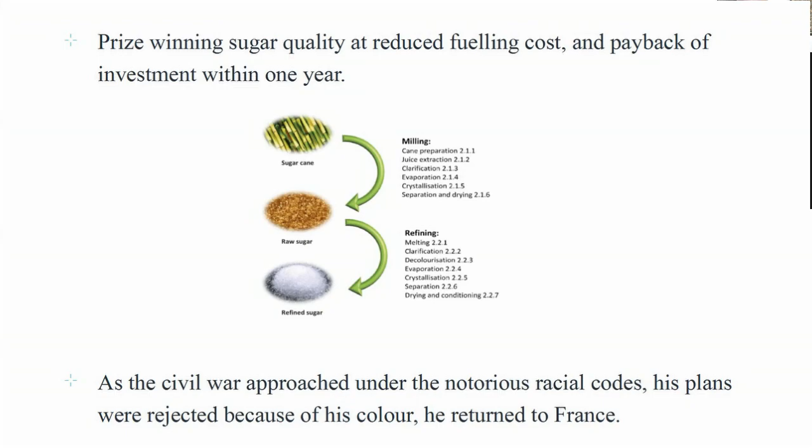Firstly, his patent was not accepted, although it was giving good quality sugar, reducing fuel cost, and giving good revenue. But because of the civil war going on and racial codes, his plans were rejected, so he returned to France. He worked with engineers there, and in 1881 he came back with a multi-stage system for sugar beet processing and sugarcane processing, which is still used in sugar refining today.

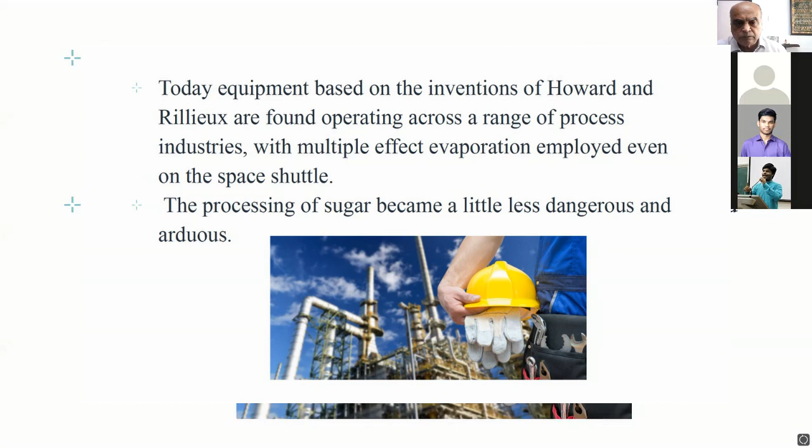This invention is operating across a range of process industries, even in the space shuttle. Because of this invention, the process of producing refined sugar became less dangerous and more cost efficient, and it benefited mankind. Thank you, that was all.

Thank you. There are two people who presented, right? Yes sir, Shantanu also contributed but he had some network issues, so I chose to take his part. Oh I see, so Shantanu participated. Yes sir, he contributed well. Okay, could you dig out any additional information, because I found that you have taken most of the stuff from 'the chemical engineers who changed the world'. But I was wondering whether you tried any other source, like did you ever look at their patents? No sir, I tried other sources, but I couldn't find work where they both contributed together in the same field.

Okay, fine. We are presenting the Waste to Wealth initiative. I'm Advay Shirwadkar, and my partner is Swapnil Gudve.

Let's start with defining waste. A crude definition of waste is anything that cannot be used at any given period. But over time, the definition changed, due to the existing and practicing technologies. It is the innovation in technology that has the potential to change the definition of waste from time to time.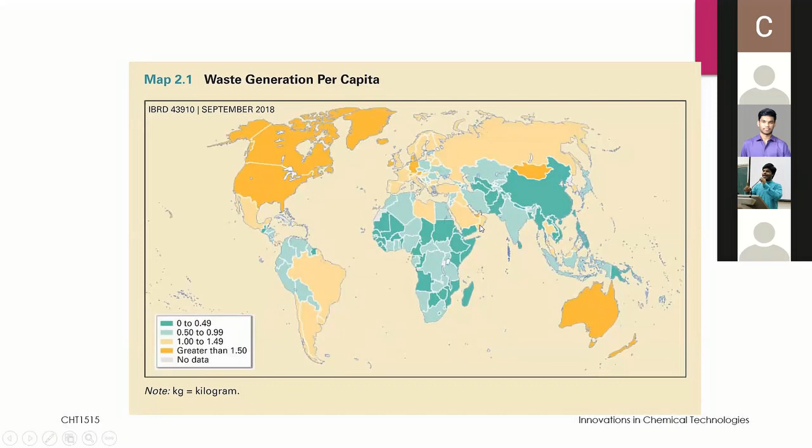USA and Canada account for approximately 1.5 kilogram waste per person, whereas underdeveloped nations and developing nations account for less than 1 kilogram per person.

Starting with the treatment of municipal waste, the waste can be treated in various ways. It can be treated at a waste-to-energy plant to obtain energy, whereas the ash or leftover is used for landfilling. Mechanical or biological treatment is generally applied to sewage water, and the waste residue is used for landfilling.

In the material recovery facility, the material undergoes certain reactions to obtain a value-added product, and the residue is again used for landfilling. In the organic recovery facility, the organic material present in sewage water or other waste is recovered, and the residue is dumped or used in landfilling.

Regarding the current waste-to-wealth initiative, Adidas collaborated with Parley to start using ocean polymers in making its shoes. It uses about 75% recycled plastic in its shoes. In 2019, they manufactured 11 million pairs of shoes, double what it produced in 2018.

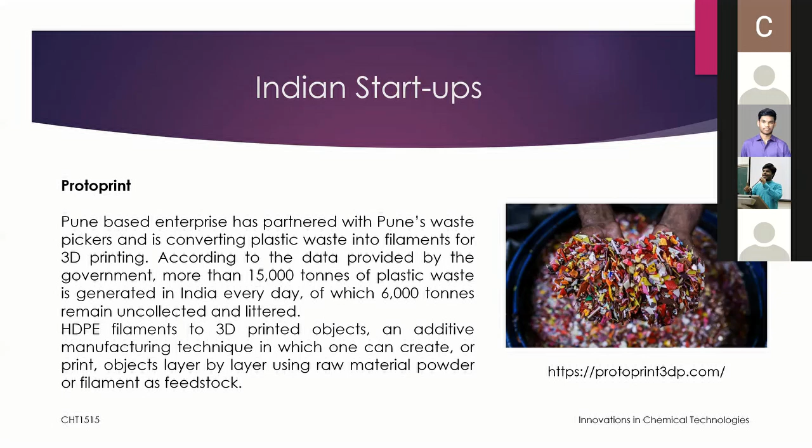It's called GPS Renewables, a Bangalore-based enterprise solving the urban organic waste management problem in an economical and environmentally clean way. It was founded by Mainak Chakraborty and Sreekrishna Sankar, and their company works on the thumb rule of a zero wastage policy. It turns all kitchen and organic waste into biogas, which has been around in India for a long time, but its installations have traditionally not taken off due to poor awareness and cost issues.

The company launched a pilot project named Bio Urja, a compact plug-and-play system that users can install anywhere with minimal civil work, perfect for bulk generation of biodegradable waste. The system has proven effective since 2013, processing around 600 kgs of kitchen waste every single day. The company has now expanded beyond India into Bangladesh, Malaysia, and even Sri Lanka.

Another startup is about cigars, called No More Butts. This startup collects and recycles cigarette waste and even pays you for smoking cigarettes, although it is harmful even when disposed of. Cigarette butts can take anywhere between 18 months to 10 years to fully decompose. Discarded cigarette butts are one of the most littered items in the world today, and therefore an environmental hazard.

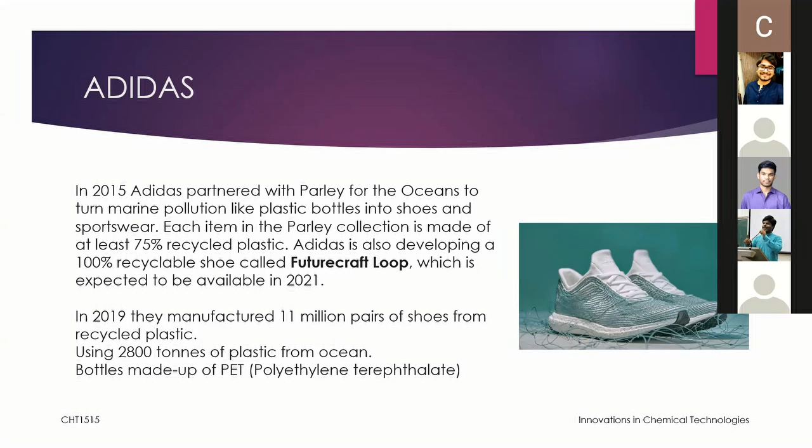Okay, now about the scientists who changed chemical engineering. I'll be talking about Victor Mills, who changed the world with his ideas such as Pringles, a well-known company that owes a lot to the soap production process, and of course the idea of using shredded absorbent paper in a nappy that could be thrown away after use, which later gave birth to the well-known company Pampers. Victor Mills, or Vic Mills as he is more commonly known, was a legend in his lifetime. He's a chemical engineer graduate from the University of Washington.

He spent his career working for consumer products giant Procter & Gamble (P&G) and was instrumental in developing some of P&G's most iconic products. Over the course of his 35-year career with P&G, Mills became the head of the exploratory product division, which allowed him to produce and improve a multitude of existing processes and products and develop a whole lot more. It drastically cut the production cost of Ivory soap, stopped the oil from separating out of peanut butter, and solved a particularly annoying problem with Duncan Hines cake mixes.

The Duncan Hines cake mixes suffered a problem which caused them to clump. Mills also developed the production concept for Pringles crisps, without which Pringles would neither be in a uniform shape nor would they stack in the packaging. However, the innovation for which most remember him is the world's first commercially successful disposable napkin, Pampers.

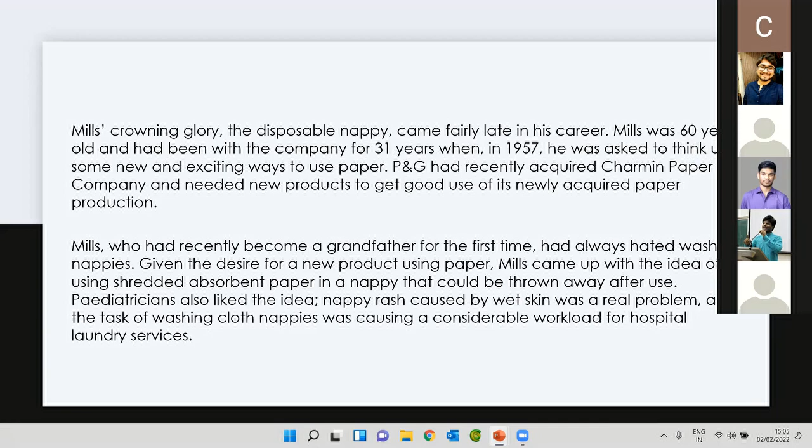The early napkins were very basic—essentially rectangular pads of tissue paper with a rayon liner and polyethylene outer. Mills's crowning glory, the disposable napkin, came fairly late in his career. Mills was over 60 years old when he was asked to think up some new and exciting ways to use paper. Recently, P&G had developed a partnership and acquired Charmin Paper Company and needed new products to make good use of its newly acquired paper production. Mills—it's a funny story.

Mills, who had recently become a grandfather for the first time, always hated washing napkins. Given the desire for a new product, Mills came up with the idea of using shredded absorbent paper in a napkin that could be thrown away after use. Pediatricians also liked the idea because napkin rash was a real problem caused by wet skin.

The exploratory division at P&G swung into action. The task was to find a product with sufficient absorption, which didn't leak and kept baby skin reasonably dry. One of the first actions was to visit a toy shop and procure a realistic urinating doll popular during the 1950s. This doll helped the engineers with early product development, and further testing was done on the grandchildren of Mills.

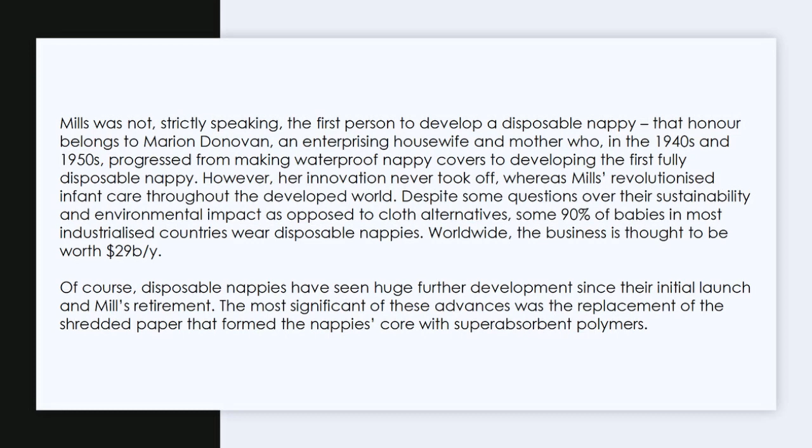Thus, replacing the thick paper with super absorbent material was found to be very innovative during that period, and it helped change the world, or it helped change a few things.

So we are going to talk about inherent safety, its principles, and we will also discuss a case study wherein we'll apply the principles of inherent safety so that they are understood better.

And the scientist that we are going to talk about today is Trevor Kletz, who's known as the father of inherent safety.

It is defined that an inherently safe plant relies on chemistry and physics to prevent accidents, rather than on control systems, interlocks, redundancy, and special operating procedures to prevent accidents.

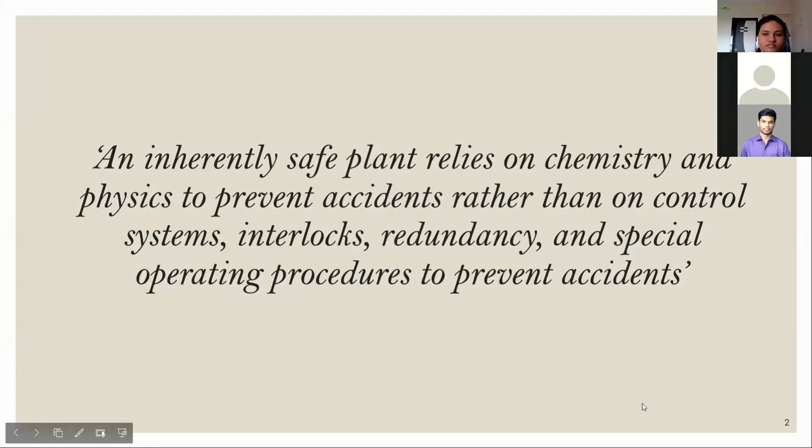Trevor Kletz, in his book called Process Plants, explained what inherent safety was, and he based that ideology on 4 key principles which can easily be described through 4 keywords.

The first one being minimize, where he said that it was essential to reduce inventory of hazardous chemicals in a plant so that if there was an outbreak of such chemicals, it could be controlled and would not lead to catastrophes.

The second keyword he used was substitute, where he said that toxic or hazardous volatile solvents should be replaced with less toxic reagents or solvents.

The third one was moderate, where he explained that it was essential that the operating conditions in a plant be moderate in terms of temperatures and pressures. Also, hazardous materials that are used can be diluted, and vacuum can be used to reduce boiling points of chemicals.

The fourth keyword was simplify, where he explained that the complexity of a plant can be reduced to a great extent, by following simple principles such as having neat piping systems, properly labeling pipes and equipment for simple identification, and also using control panels that are easy to understand.

Our idea, we are going to explain through a case study. We have taken a particular accident and applied these 4 principles of inherent safety to it, explaining how it could have been avoided and how the extent of damage could be minimized by following those 4 principles.

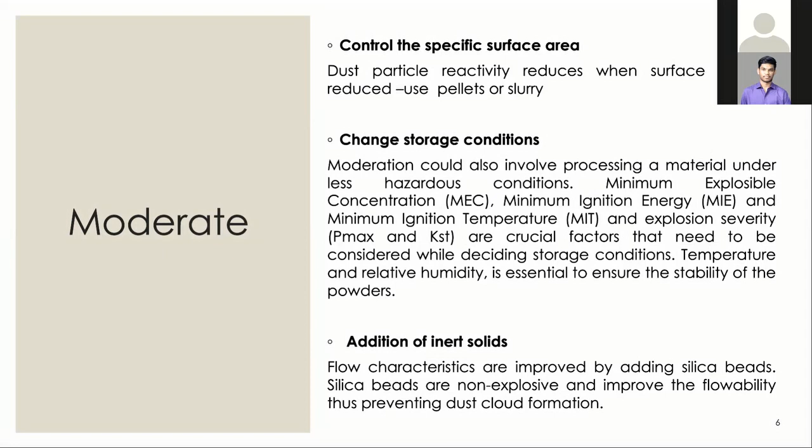The next principle is simplify. It was also noticed that because of the presence of a certain exhaust duct at the exit of the ruptured disc, the exhaust flow and dust particles could not easily escape after the allowable pressure was reached. If we could have removed this duct, the flow rate would have been such that the accumulation of dust particles in the conveyor belt could have been reduced, and the explosion could have been stopped.

Snehal will take it from here.

The next principle is minimize. First, we could have minimized the volume of dust clouds generated at the transfer points. This could be achieved by changing the equipment design and achieving mass flow rather than funnel flow, as funnel flow generates dust clouds, whereas mass flow lets the entire sugar powder flow in as one bed.

There was a secondary unit with hammer mills crushing the sugar into fine icing sugar, and that was the primary area of explosion, which then got carried over to the entire plant. We could have also minimized the formation of dust layers, reducing the amount of hazardous material collecting in the plant by removing the dust deposits.

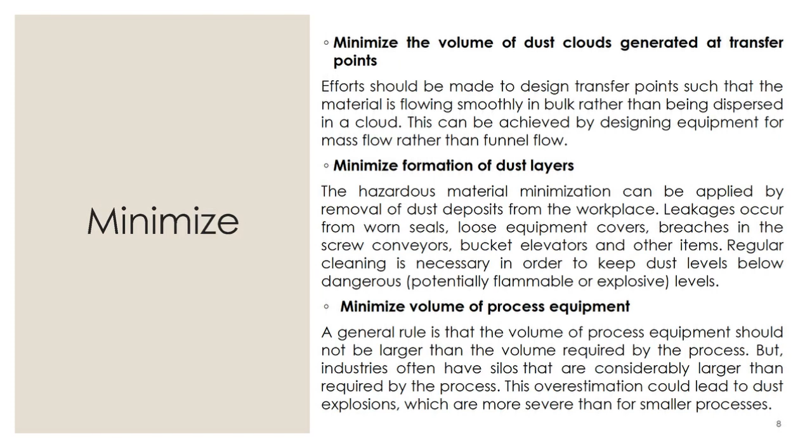We could have also substituted the explosive materials where possible. We cannot substitute the sugar dust, but to allow the icing sugar to flow, the company added starch beads, and starch beads have a similar problem of combustion. So we could have switched the starch beads and added silica beads instead.

We could have also substituted the work procedure. The sugar dust accumulating on equipment was being removed by workers using compressed air, and that created sugar clouds. That same dust accumulated on the overhead pipes where housekeeping normally didn't clean. Over time, the entire factory had large quantities of sugar dust, which finally got ignited due to the initial explosion.

And as mentioned earlier, we would have changed the hopper design to make mass flow possible rather than funnel flow.

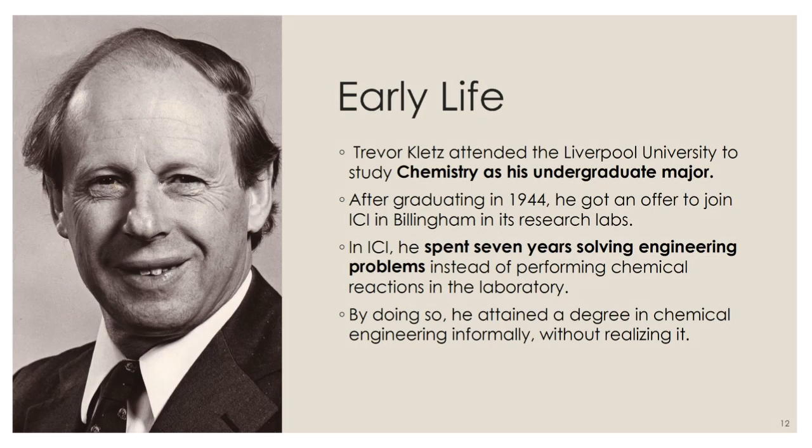After 7 years, he got promoted to plant manager, where he ran plants and did troubleshooting. He observed the foremen and realized that even without up-to-date operating manuals, they had their own philosophy of working around problems. He also learned something about managing people, and thought that good-natured persistence got him places where other things did not. Those 12 years of experience raised his interest in process safety, and he began thinking in that direction.

Tanvi Varadkar will be taking over from here. Kletz's first formal safety assignment came in 1955, when he was assigned the role of part-time safety officer at ICI. Back then, nobody really paid much attention to safety, and they did not realize it required technical input. To them, safety was all about removing mechanical hazards and wearing protective clothing.

It's often thought that HAZOP is Kletz's brainchild, but that's not true. There was a culture in ICI where engineers practiced something known as critical examination of plants. Ken Gee, a production manager at ICI, used this technique of critical examination to design a new phenol plant, and it helped him discover many potential hazards as well as operating problems well beforehand.

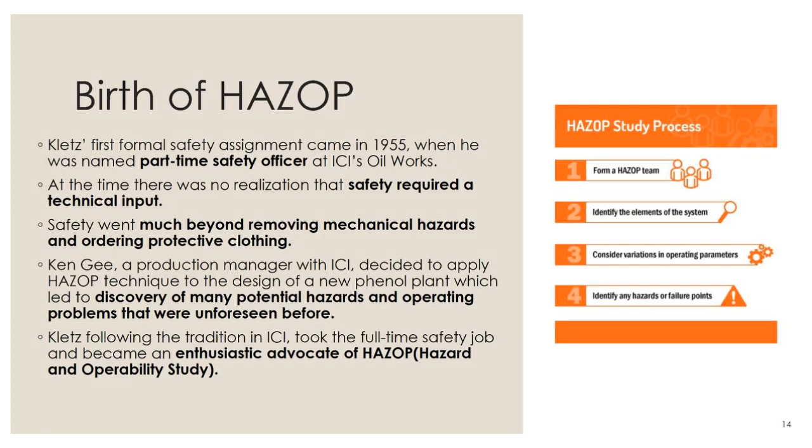Later on, a very new position was given to Trevor Kletz, which was a technical safety advisor, because he was one of the only people among his peers who showed more interest towards the safety aspects in a chemical plant. They needed someone with a very strong technical background, and Trevor fit that designation.

His job was basically to advise designers and operating staff on how to avoid accidents. He realized this task was very challenging, but that was the thing about Trevor Kletz: he had a strong technical background but also great people skills. He realized that convincing people was possible through persistent persuasion, by showing them the consequences of bad practices and design, and sharing the lessons of accidents that had happened previously.

Another challenge Kletz faced as safety advisor was to ensure that safety lessons were never forgotten. He emphasized this in his autobiography, By Accident, where he said it is not sufficient to check that rules are being followed, or people will stop following them as soon as attention decreases towards a certain event. We have to convince people that they should be followed, that safety cannot be taken lightly, and it has to become an integral part of the daily workings of a plant.

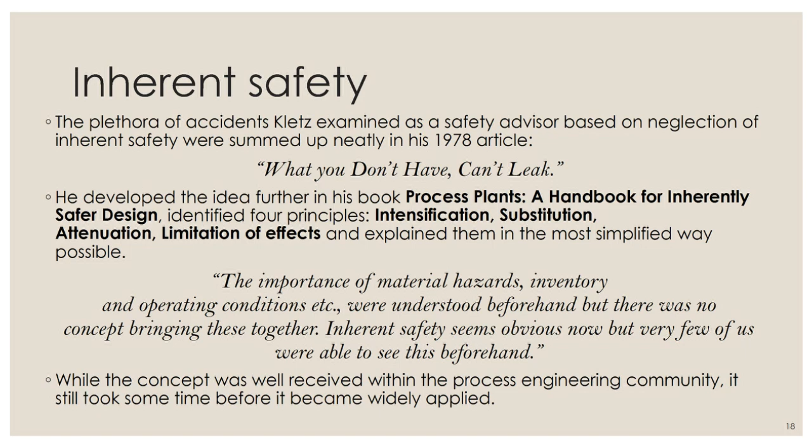During his 14 years at ICI, the fatality rate of the company fell from around 7 fatalities per 10^8 working hours to 2.5, in a matter of 14 years.

Some very large-scale accidents that took place during that time, such as the Bhopal gas tragedy, could have had the damage minimized or could have been avoided altogether had Trevor Kletz's tenets of inherent safety been applied. At this point, the most important contribution of Trevor was that he gave process safety a certain respectability. Before that, safety was something done after the design process was over, because it was seen as a way of controlling damage.

So yes, that's what I was concluding: because of him, people started becoming more aware that safety can be applied at the design stage itself, instead of doing it at the end of the design procedure. So that's the end of our presentation.